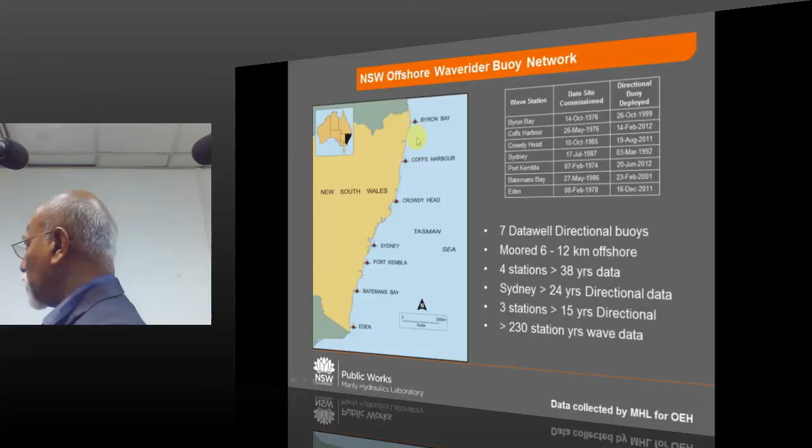When I was at LHI, we had three data buoys, but here we have seven, and four of them have been running over 38 years, all directional data buoys now. With Sydney, for 24 years we have three stations, 15 years directional, and altogether 230 station years of wave data.

It's about one of the best databases in the world, arguably. They're all in about 80 meters of water. The Sri Lanka ones were in about 20 meters of water, so when you're using a numerical model, you can't use it so extensively closer to the shoreline. That's a bit of a disadvantage we have in Sri Lanka.

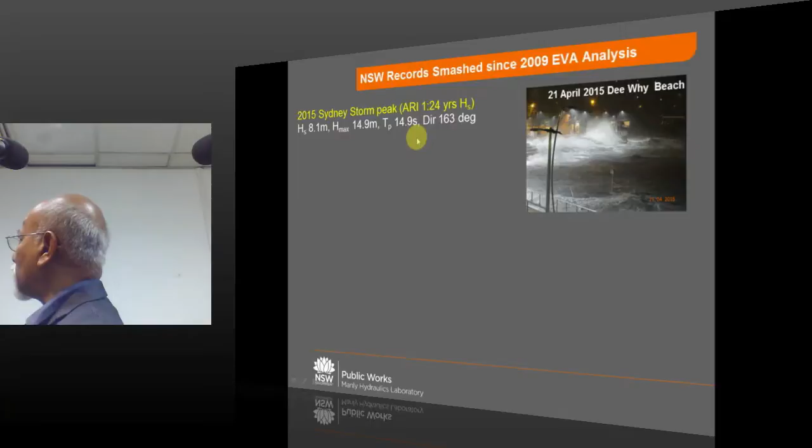This is actually two storms that happened quite close together. Notice here the direction is 163 degrees, coming from the southeast of the coast - you saw the coastline there. 97% of storms are from the southeast, but the June 6th storm was an unusual one.

This is the largest wave ever recorded, at 17.7 meters. This is the aftermath on the shoreline from that same June storm - you can see a swimming pool here, and these are very expensive houses at Collaroy Narrabeen, only about 10 minutes from the lab, so we've looked at this quite often.

Is there anybody here from the Coast Conservation Department? No? Well, the 100-year wave height in Sri Lanka when we were there was about 4.5 meters - say now it's 5 meters. This storm was well over 8 meters.

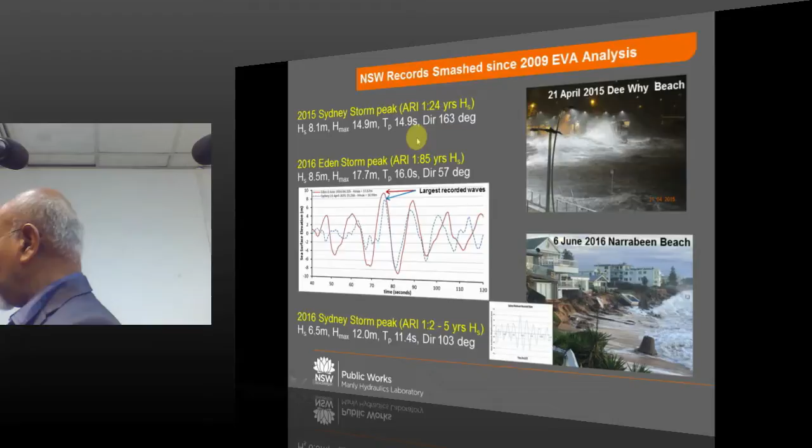Generally the size of a unit is the cube of the wave height. So for 5 meters that's 125, and for 8 meters to the power 3, about 512. So you can say any unit you use must be about 4 times the size of what we use in Sri Lanka.

Now, remember those wave data buoys - this is the storm. You can see how you can track a storm, and this immediately became very big. This is the largest wave ever recorded, and the most noticeable thing is the direction here is 90 degrees. Most of the time, 97% of the time, it's 160 to 180 degrees, but this storm remained at 90. That's why the nature of the damage was so different from previous storms.

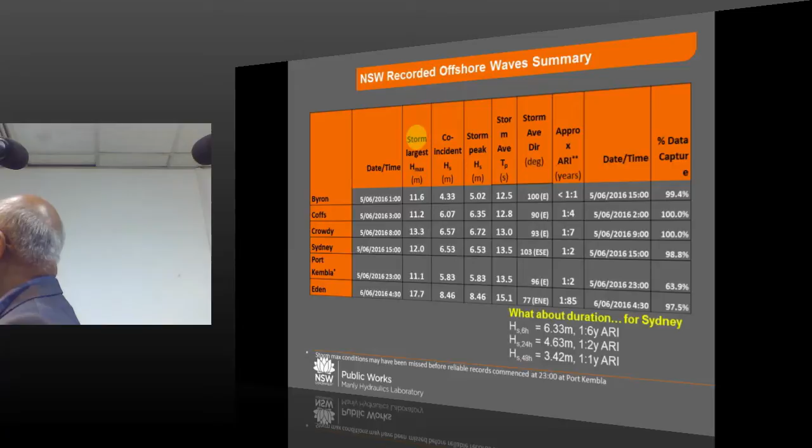These statistics show how important it is to collect data right down the shoreline. The lab has collected all these statistics - here in Eden, the maximum wave is 17.7, and wave periods are generally 12.5 to 15, which is useful when you're numerical modeling, because then you know what an extreme wave period is like.

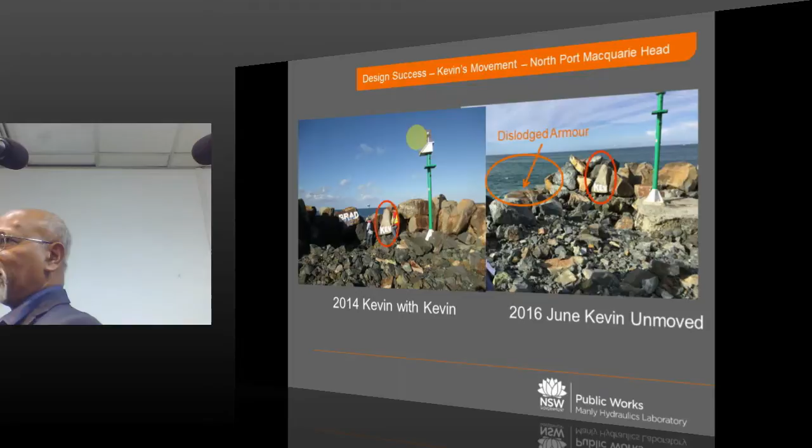Then there are successes also. This is Kevin, who does the drones, and in 2014 we named a rock after him because he's also about 125 kilos and plays prop forward - he doesn't move much. After the storm, all these other stones moved, but Kevin did not move, so he considered that a personal triumph of his.

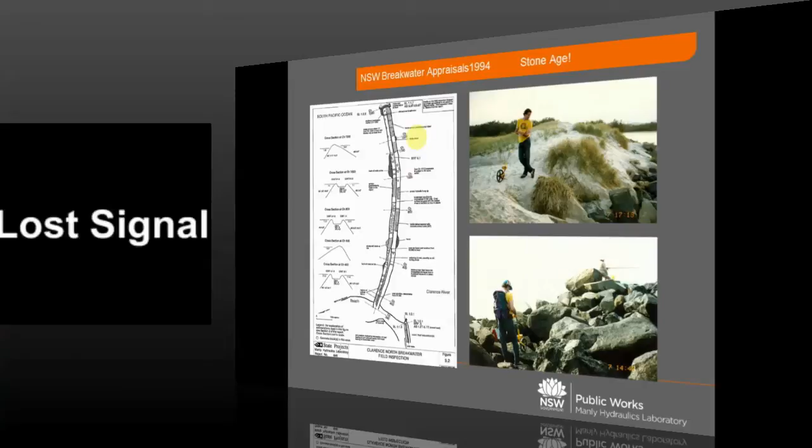I'll give you a brief history of changes to the breakwater assessment. This is Rob Jacobs, who's retiring next month after 36 years of work in the lab. He's not an engineer, he's a science officer, and a very meticulous guy. He first did the assessment of the breakwaters in 1993, and he put in all these details.

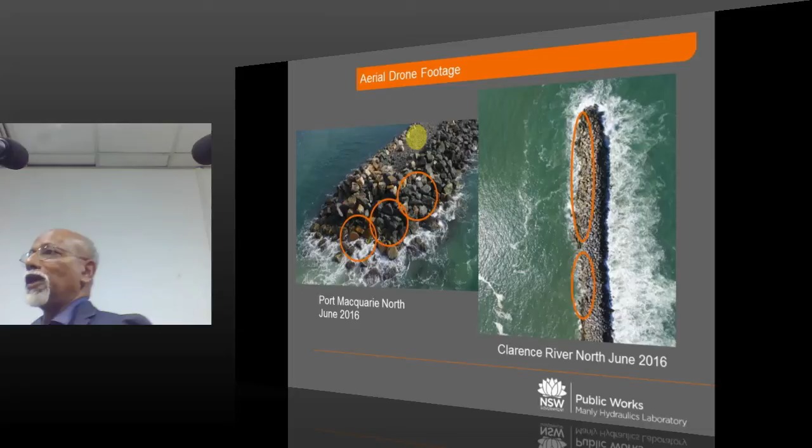Again, here are drone pictures - instead of climbing down a breakwater to photograph, we just put the drone up and get it. These are all damage photographs of a newly repaired breakwater. Previously, all the breakwaters were damaged on the southwest side, but here we're getting breakwater damage on the ocean side, or northeast side, because the storm was from the east. So it was an unusual learning curve for us.

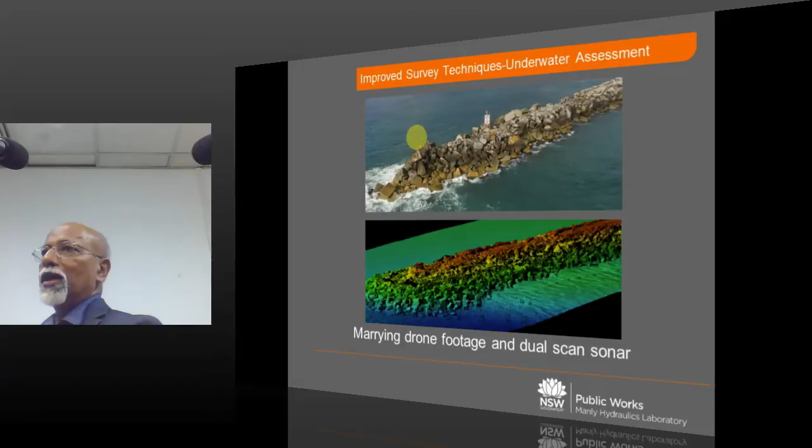Here we have a dual scan sonar, and we mesh it with the digital terrain model from the drones, and we can see almost every rock here. We can see movement, we can compare it. So that's how easy it has become for the younger engineers.

I'll give you - this is a quite famous guy called Melby, from the Corps of Engineers in America, and he outlined the functional design: plan and profile geometry, wave transmission, overtopping, wave diffraction and reflection, then filter sizing, armor stability, geotechnical settlement, toe stability, armor unit sizing, armor layer geometry, armor unit structural capacity, maintenance strategies, and assessment documentation.

This is actually - I don't know if you've heard of Stephen Hughes, he wrote the Bible on coastal wave and structure modeling. He was doing his PhD while I was doing my master's at the University of Florida. So when I told Steve I'm doing a talk at the Institute of Engineers in Australia, he sent me some slides. I want to acknowledge him, and since it was quite related to our breakwaters, I thought I'd put this up.

He says 265 navigation projects - if you have two training walls in each navigation project, you'll have 500 structures there. 40% are breakwaters and jetties, and 40% originated in the 1800s. It's very similar in Australia, the percentages - that's why I put this up. The design reality is, the majority of existing structures were designed and built without even rudimentary design guidance.

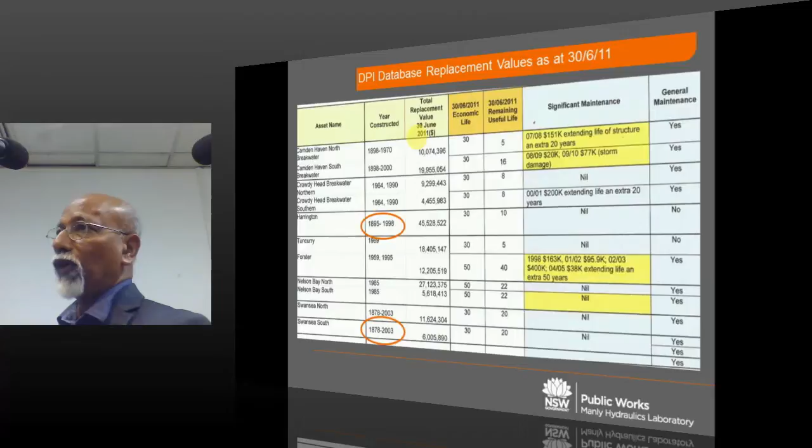This is what we've had all through the years. Now we have a computerized system, but we've always maintained good records. You can see that some of these structures were built in the 19th century. An economist gives us the remaining useful life, and since it's about a 1.5 billion dollar asset, we have to maintain it.

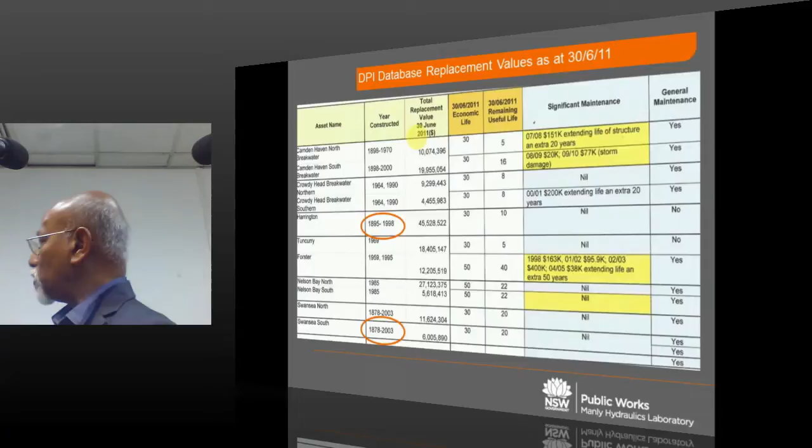We go and inspect these breakwaters after storms. But when there's a big storm, we inspect the whole coastline. I've done that on about four occasions: once in the 90s, in 2012, 2014, and then again after the June storm.

This is what the US Army Corps does. These guys have much more detail. They break the breakwater up, and they not only look at the breakwater, they also look at the shoals, the ebb shoals, and the harbor shoals.

Has anybody here done coastal engineering? There's Hetty, I know. It's important because it influences the structure. All the coastline, all the shoals around the area and between the training walls, influence the structure, so they look at all that.

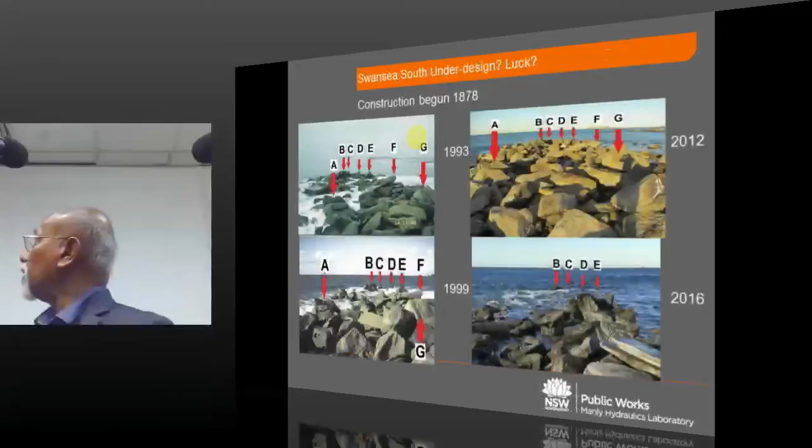Adapting to changes in functionality and adaptive design. You could say it's best to keep the breakwaters very well maintained.

But you can see here, this is the Swansea breakwater, a little further south from where it starts. You'll see the stones have not moved at all. A person might come and say we need to improve this, but it has served its purpose for 20-odd years, and we can see the stones have not moved at all.

This time things have gotten much more efficient. In those days we used to go in a car, and guys used to take their surfboards and all that. Now they make us go on time. There's a disadvantage in that - we fly to a point, then use a car, and they give us a certain time to do everything.

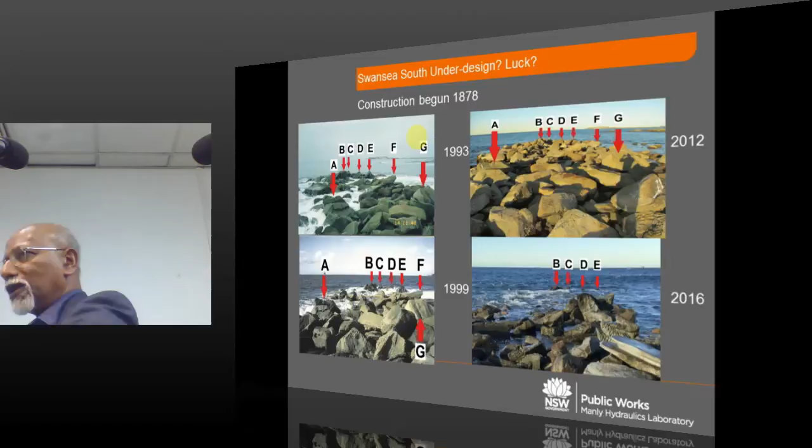Sometimes the tides are high, and earlier we would have just hung around and waited three hours for the water to go down before doing the assessment, and then we got all these pictures. This time we couldn't do that - the tide was high, and we had to finish the breakwater, so we only got a few shots. But you can imagine the stones were just the same.

This is a function that has changed completely. You'll see later - when I first went into this breakwater in 2008... actually I first went in 1990. I used to wonder why all these massive stones were used - what a waste of stone, I thought. You'll see later on that you don't need to have stone most of the time.

Then when I went in 2012, this huge outlet here had become a narrow outlet. You can see that, like in the Kaluganga, it got closer to the breakwater. If you look at Kaluganga, at one time we had a situation like this, and it got narrower. Then when I went in 2016, it was all sand.

So what happened here? This is what happened - you can see how past engineers used their experience when they built this. I was wondering why the rock was so huge and whether it was wasted. No, it was not, because every 20 or 25 years there is a breakthrough here and big waves hit this.

And here it's all sand, so this part is totally protected. That's what you call a change of function in that breakwater.

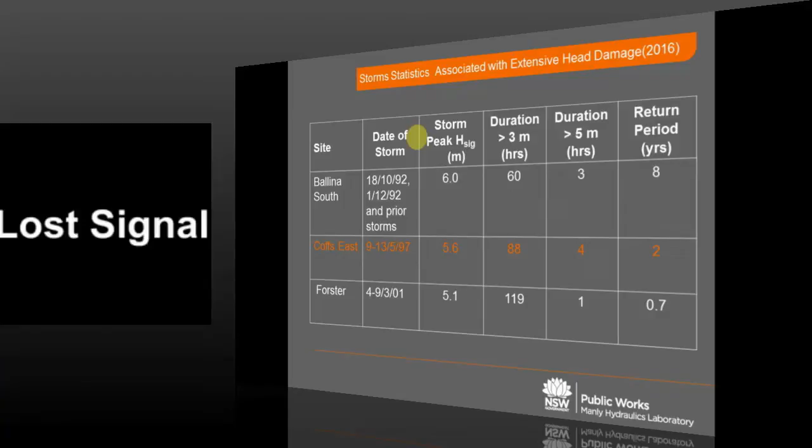So I'll just talk about 3 breakwaters, and these you have Coffs Harbour, probably the most exposed breakwater. We modeled these 3 breakwaters and they were quite successful, so I'll just talk about them. But the last one, we had quite a big failure this time in 2016.

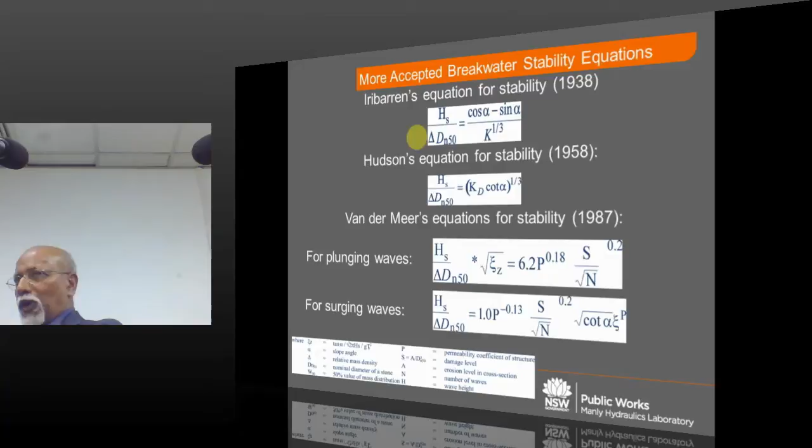I'm sure there are lots of people here who'd be interested in a bit of maths, just some equations here. Very surprisingly, this Iribarren almost got it correct in 1938. Hudson was a mathematician, so he used very few variables. You will wonder how come this is almost still used by all the Americans, and they don't use Van der Meer's. The Europeans use this, but they do the same thing. They get a stability number which should be about below 2.5 for a normal breakwater. But how come this is quite equivalent to this?

What Hudson did was, because he was a mathematician, he just used the minimum amount of variables, and all the variables were included in his physical model testing. He changed the water levels and so on, and he got the same result, and it's very effective still.

While Van der Meer put in all the variables, permeability - you'll notice here there's no period. How come you can test without a period? That was by changing the water level and having the waves breaking on the structure. Now here, he has included the period in this surf similarity parameter and the number of waves and so on and so forth.

So that's a very surprising set of equations in engineering, how the same thing is done with entirely different variables and quite effectively. The Americans partly don't use this because it was done in Van der Meer's PhD thesis using only 8 tests. But it's quite successful - he has modified it slightly over the years, but it's quite successful. Americans don't like that though, and they just keep on using Hudson.

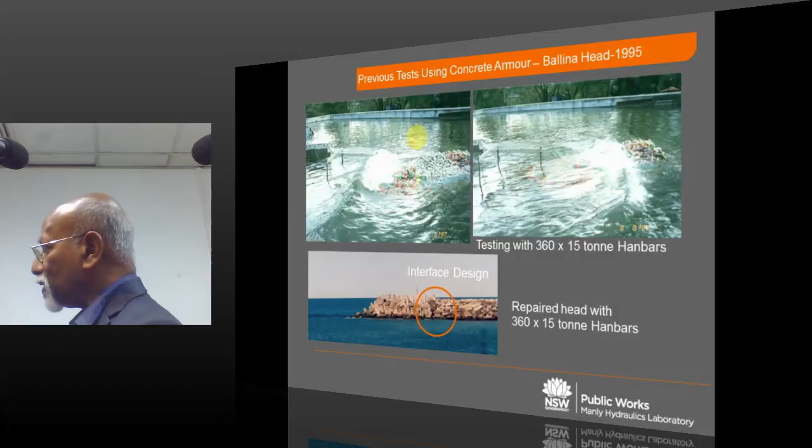Some of the problems here are that you have an interface between armor units and rock, and you have to mesh them very carefully - 10% size difference if they're to be successful. But the contractor didn't do that, and this is what happened. On the river side, it was well constructed. On the ocean side, the rock was much smaller than the armor unit, and there was massive damage.

But we repaired it in 2015 using big rock, and for the June 13th storm there was very little damage. So it was quite a successful repair. This is because we were using Hanbars, an Australian-made unit. Not much testing had been done, so I did this testing to compare it with other units around the world - the Antifer cubes, Acropods, which are very successful.

Here is damage, and here is what I call the stability number. You remember I said 2.5, so you want to stick in this range for your units, and you want to get lower than about 8% damage and so on. This unit has been very successful - this is what you call a third generation unit. But it is not used in Australia simply because of prejudice - it's a single layer unit and people don't want to use it.

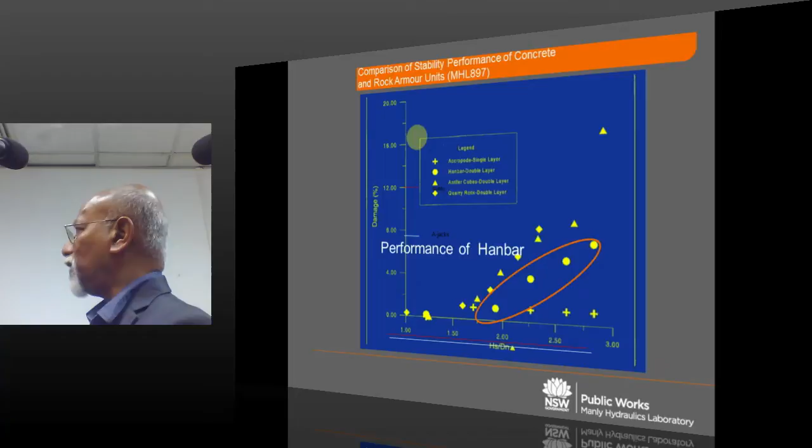So till someone uses it, nobody will use it. It's used elsewhere in the world - I think it's used in one place now. But mostly we use Hanbars, which is an Australian-made unit and quite successful. We have tested quite a lot of them. Peter Hanley from our department actually originally designed the unit.

And this is rock. Rock can be placed quite accurately now. But recently, when I talked to Steve and some of the guys from SURF, they sent me these photographs about a year ago. This is how we normally use them in Australia. These guys, I'll show you later, the Yaquina jetty where it was very difficult to repair.

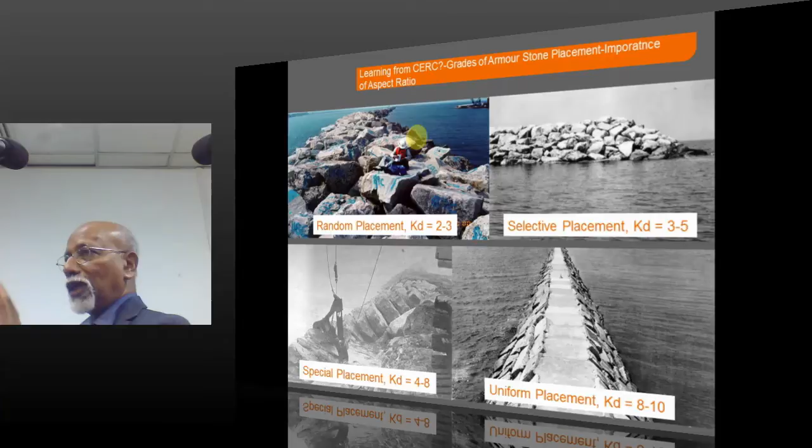It was damaged, massive damage. And they couldn't use concrete units, but they used rock in a very specific way where you have the lengthwise axis placed about 2 times the width. Normally you'd reject such a rock from the quarry, but they used it very effectively and got very high KD values.

KD value, I should have explained that, is a form of how you reduce your armor size. The higher you have a KD value, the lower your armor size. So you can say if it's 3 and this is 9, the armor size here will be 1/3. I don't know if you got that from that equation, but that is the kind of ratio.

Using numerical modeling to breakwater. My first numerical model was in 1996, and we used what is called the Mild Slope equation, and that's REF/DIF, and that diffracts the waves quite well.

The surprising thing when I did this modeling was, you notice here it suddenly jumps up at a chainage range of 1100, 1200 meters from the head. So they said, well, how can you have that? And I said, well, that's the result we got. We did it and we still got that. So I put it in the report. And then people said, oh, that can't be, that's not a proper result.

20 years later, in 2014, we were inspecting this breakwater, and exactly 200 meters from that was this massive hole. So the waves are getting concentrated there, and it was quite a good explanation of how accurate numerical modeling can be. And these are not the best models.

Now you get what's called the Boussinesq models and so on. This was slightly less effective than a Boussinesq model, but it did its job, and we quite accurately predicted that. That was one of the successes.

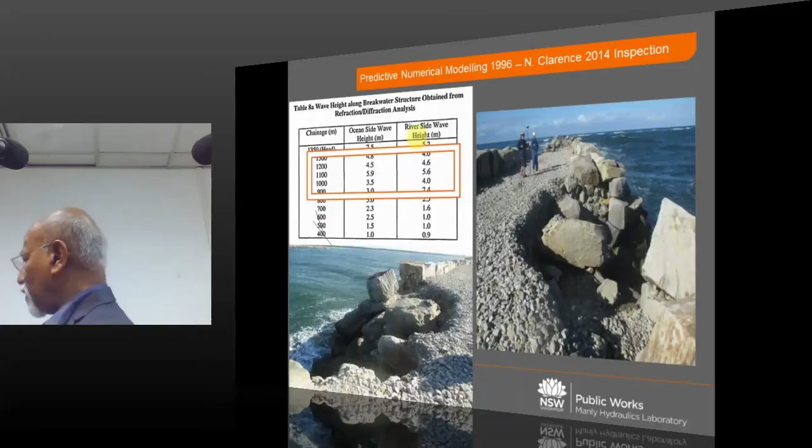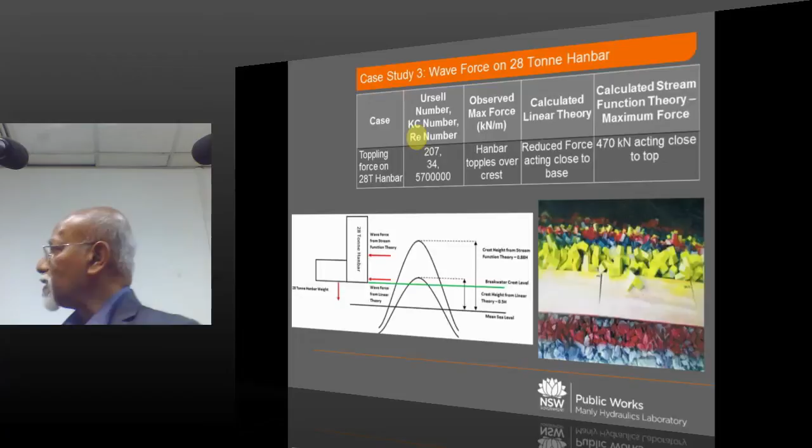So this is just an example of how you use second order theory and how useful it is. When we did the modeling, I'll talk to you about the Coffs breakwater.

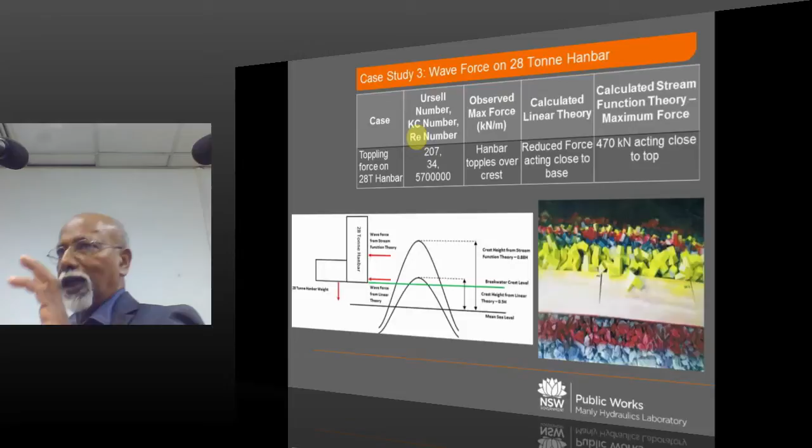You see these are all interlocked, and we had 28-ton Hanbars. These are 3 meters high. In the model it was about 1:45 scale, small units. They were displaced. And this is where the contractor, the construction and design engineer, and the supervisor have to talk together. I'll come back to this slide.

One week, I think the supervising contractor fell asleep, or he didn't attend, or he was ill or something. So the contractor happily went and replaced these, not like this, but vertically, over the 500 meters of that breakwater. And so they were very worried. We said, we didn't want to take any responsibility, this is not what we modeled.

So I did a quick calculation using what is called stream function theory, and that's what that previous slide showed. When you use stream function theory, if anybody is using it, it's not like cnoidal theory, it's quite easy to use.

Over about a 10-year period, Wiegel developed the tables on cnoidal theory. Similarly, a guy called Dean, Robert Dean, developed the tables on stream function theory. You can see here the stream function theory is the same wave. If you use normal linear wave theory, it's about halfway. Stream function theory shows that the crest is very much bigger. So if you take moments about this point, there is a massive load working, and you can show that it can topple if you keep it vertically.

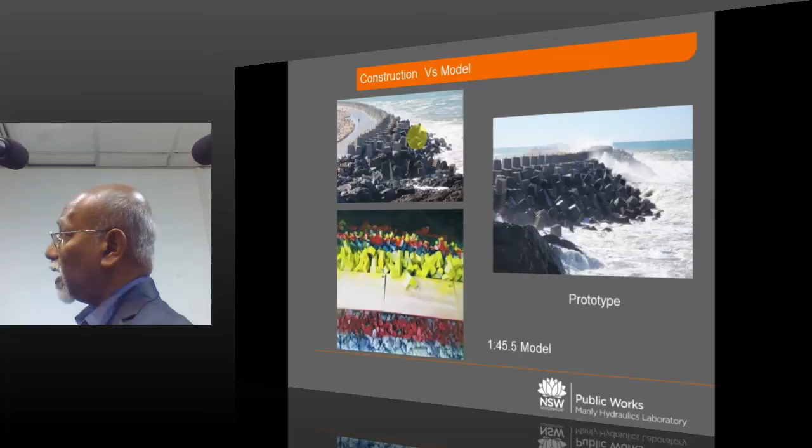So we wanted to exonerate ourselves, and we said, well, you have built it like this, but it can fall. So we left it at that. You can see how big these are - see this band here? They are massive, massive units.

And that is it, so this is a continuation of the stream function theory. I used it in a different paper to reconcile forces in a physical model with linear theory and second order theory. I used second order theory to reconcile some of the answers we got.

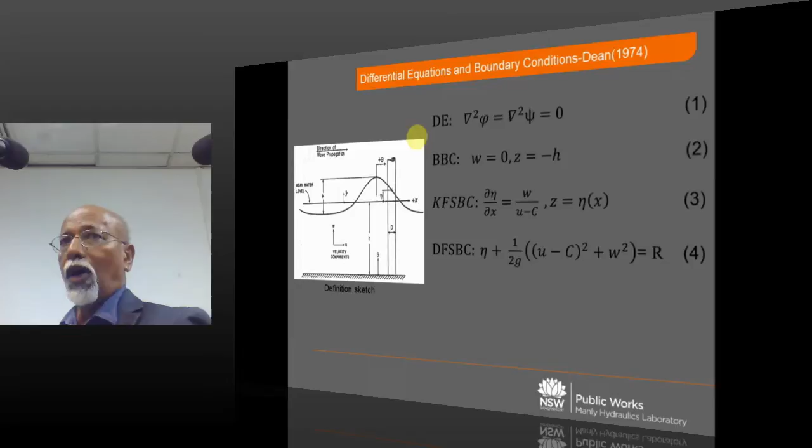So I'm sure if I don't put any equations, there will be a few guys here who will be disappointed. So I just want to show you about stream function theory, Dean, 1974. He was the chairman of our department in the University of Florida. He was essentially a mathematician who later became an engineer. And so you have the Laplace equation, bottom boundary condition.

We are saying the vertical velocity is 0. Then you have what is a kinematic free surface boundary condition, talking about the slope of the wave, and this is essentially Bernoulli's equation. What is interesting here is it's almost like Fourier transform analysis - if you've done any physical modeling, you will take 50 points in a physical model, unlike in real life where you take 2 points every second, so it's quite useful in a physical model.

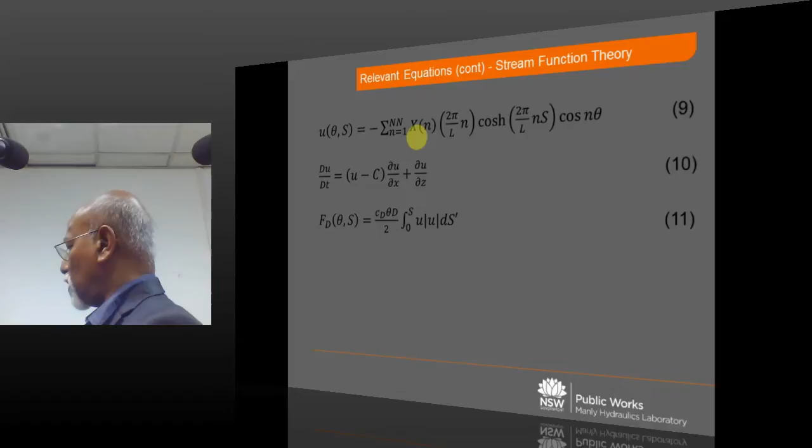You can use this stream function theory because it's like fitting a curve, just like Fourier transform analysis, and this is just integrating all the velocities to get the force. You're using a CD, which is a coefficient of drag. Now, going on to another aspect, this is wave runup, another design consideration, a very important aspect of breakwater design.

If you have a very smooth surface, concrete, you get 1. If you have rock, you get almost half that. And you'll see how that affects things. If you have an angle to the wave, no angle, you get a massive amount of runup. If you have just a 60-degree angle, much less. You'll see how that applies.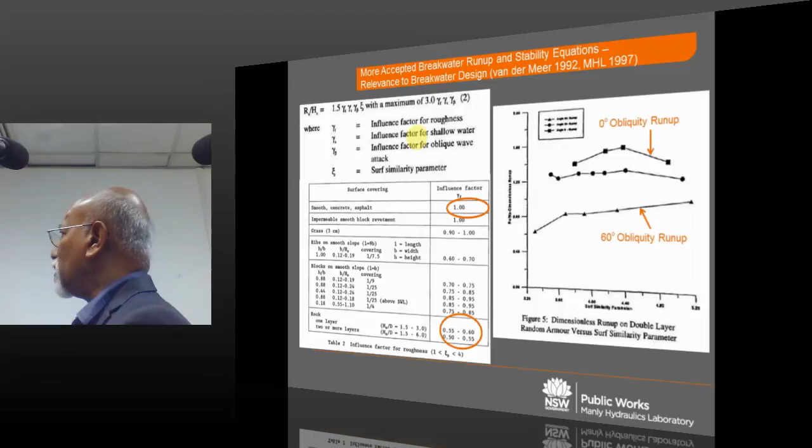But the actual - now you saw the overtopping in that first video, there's very little, as you can see how difficult it is. Prototype measurements of overtopping are very little - only Fukuda is supposed to have got it, now recently some others have done it, so it's all laboratory measurements.

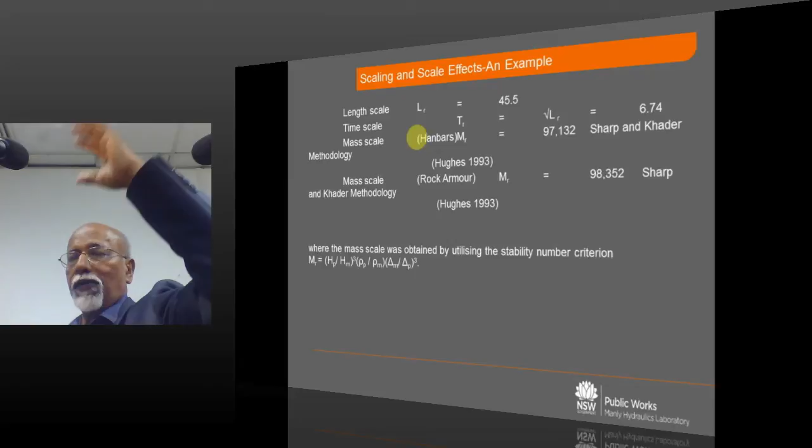This is just about scaling, Froude scaling, you must consider. We use two methods of mass scaling, Sharp and Khader, and Hughes. When the prototype armor is, say, basalt 2.6 and we are using very low density armor, we use Sharp and Khader. Otherwise, we use the Hudson's type of scale. That's all I put in.

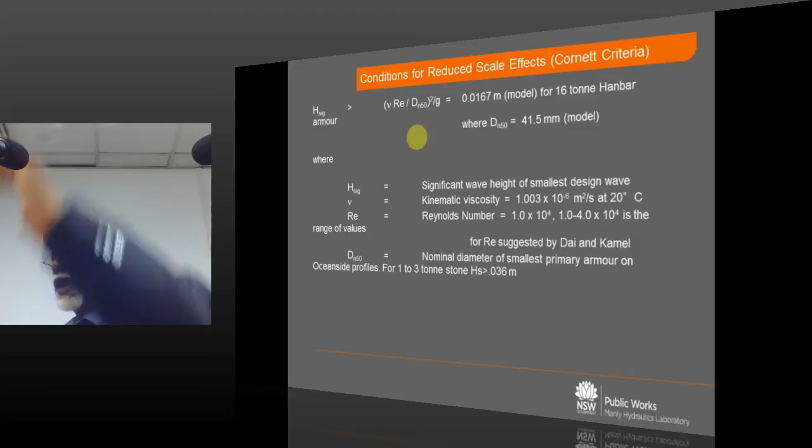This shows the conditions for how you get your scale in a model. We use certain Reynolds numbers because we don't want laminar effects in the model, so we suggest about 15 to 20,000, and we base our wave heights on that and scale accordingly. In this case, because the smallest stone is 3 tons, we have to use a wave height of 3.6 centimeters. If we use wave heights of about 5 or 6 centimeters, scaling effects are low, so we can guarantee the stability results. That's how we make sure our modeling is fairly accurate, or quite accurate sometimes.

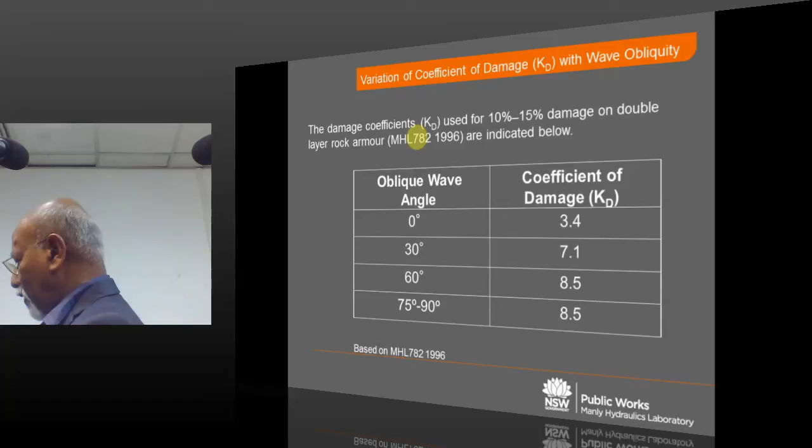You'll see why we did this. Simply because, these are models of a breakwater, Foster, which I talked about earlier. It goes down, and as you can see, the wave is 90 degrees here. But as it goes along the edge, 200, 300 meters down, it changes to 60, 70 degrees. What happens there is the KD changes. So down at 200 meters, when it's 60 degrees, you can use stone which is 2.5 times smaller, which saves an enormous amount. Those days, 100 years ago, they didn't know all that, so they used massive stones. But now with more analysis, we can use smaller stones in the design. So that was the reason for using oblique wave testing and measuring direction and so on.

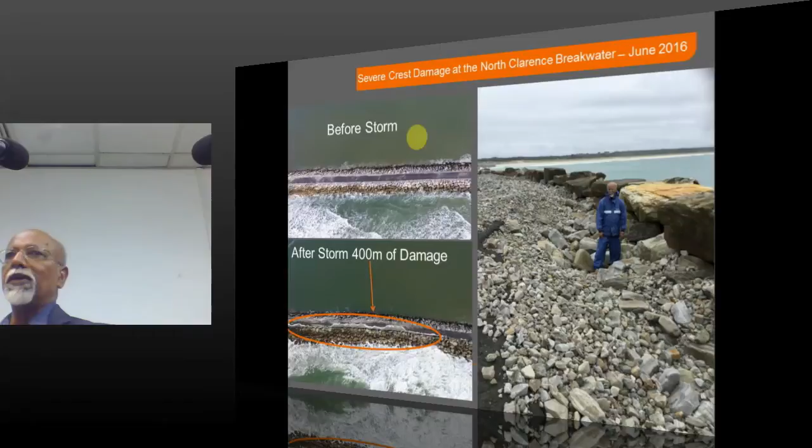This is a big error we made. We repaired this breakwater about a year ago, the longest breakwater, 1.5 kilometers long. We repaired it, and after the storm, we had 400 meters of crest damage. Here it is. Why was that? Simply because, remember I said when there's concrete, the friction factor is 1. When you have the armor, two-layer armor, the friction factor is about 0.55, half.

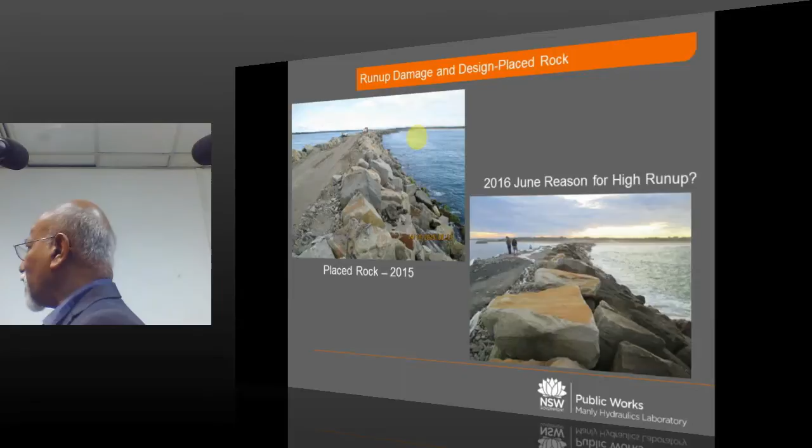Because in those days the repair machinery was not so good, they dumped it. Of course, you had to pay more to the contractors, but there was a lot of... this is not the best example, there are examples where it is very high friction. But with better machinery and contractors wanting to use less stone, they smoothen this out quite a lot. As a result, the waves run up much more and the crest gets damaged. So those are some of the pros and cons of using modern day machinery and very good reachers and so on.

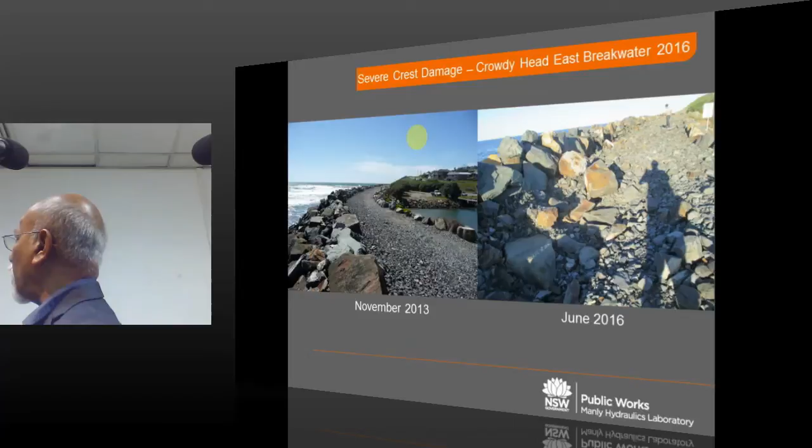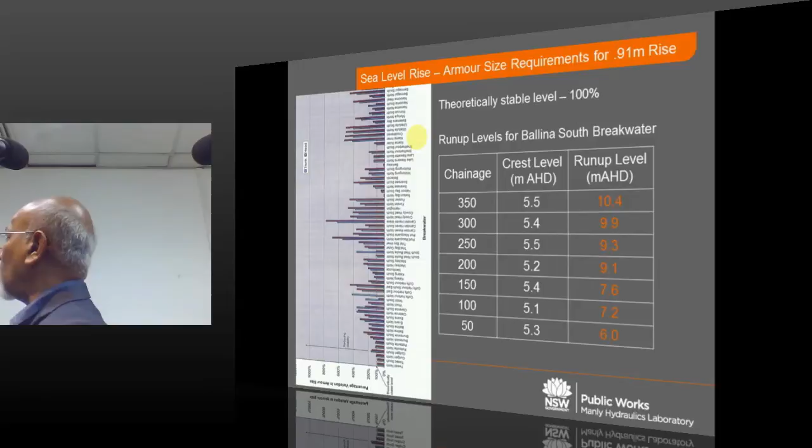Now this is a sort of solution for high wave runup, putting in a berm. This is one of the physical models I had done, and it showed that when you put in the berm, there's very little overtopping. But it is an expensive solution. There are places where it is necessary, where it's so dangerous.

I'll show you something - this is a berm, the only berm I could find in the 68 breakwaters. I don't know how it came there, there's no history of it. This is in Narooma, and we are doing an assessment now. Here the crest was not damaged, like in the previous one I showed you where the crest was damaged - this is just the breakwater next to that one. The crest was not damaged simply because of this berm. I don't know how the berm got there, probably it was a much lower breakwater originally. This was the head, and they extended the breakwater, keeping the original head this way and making this. So there is a natural berm there, which prevented overtopping and safeguarded against breakwater damage.

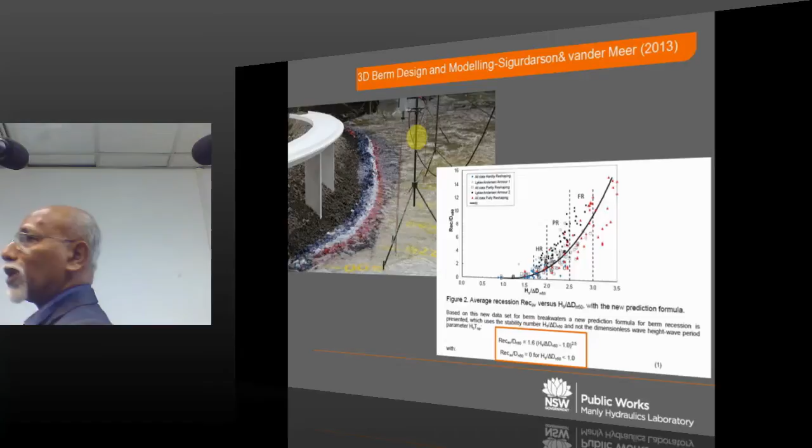This is actually modern - this guy was involved in the Hambantota design of the breakwaters, and I keep in touch with him. I worked with him 3 years ago, and he sent me his paper on Hambantota breakwater design. He's from Iceland and is an expert on Icelandic breakwaters. This is a model we did about 3 months ago, and we saved about 10 million. We are now using what is called berm design for getting better berms and designing them.

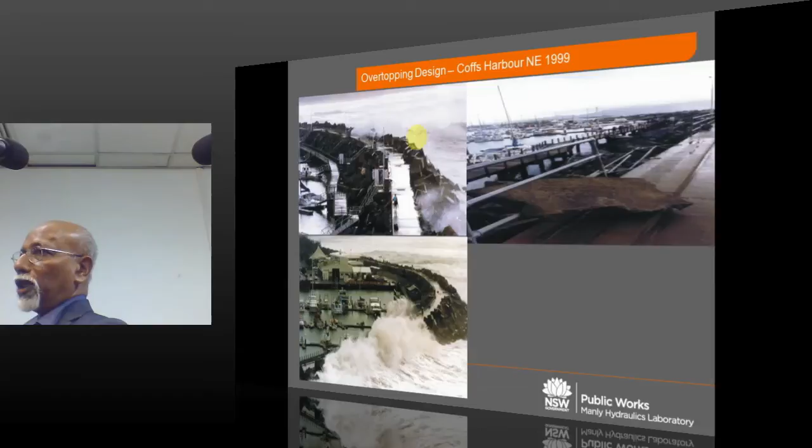Here's a place where a berm is necessary. There's a beautiful island on this end, and people keep walking through during storms. Can you see the storm going? This guy is happily walking through, and these are the kind of rocks that go through. There were two massive rocks which moved in this storm, which actually hit 2 boats, and they went down into the water. So this is a very dangerous place. Now what the department has done is put a gate across, and we forecast the waves - if there will probably be northeasterly waves, we lock the gates to prevent people from going for safety reasons.

Simulating accurate storm damage is very important for breakwater design. So here we have the Forster breakwater which I talked about. Every 3 years we had to do $200,000 worth of repair. We said, let's do a model. They said no, we'll just repair it again. They repaired it again, and for a small wave height, only 4.5 meters, it really got damaged. Then they asked us to do a model, and we did it. We showed that 8-ton armor units get damaged quite badly, but 11 tons is quite good. So we put in the 11-ton armor units, and this is the final result - we had 5 storms, some well over 4.5 meters, and very little damage to the breakwater.

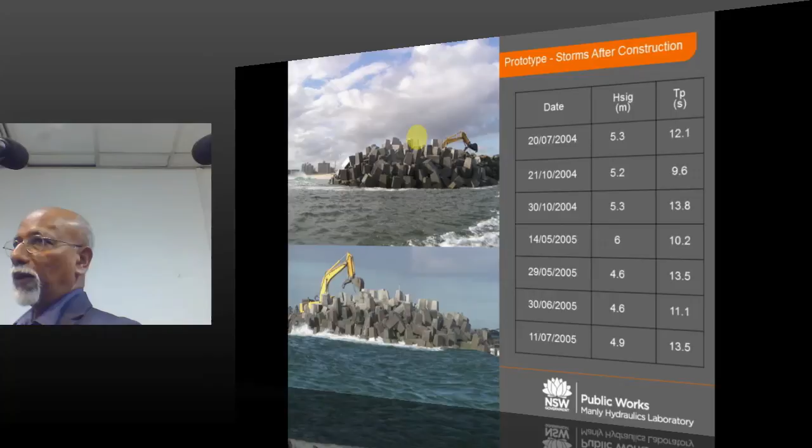But I told you about the state of a breakwater - as time went by, in the first year there were 6 big storms and nothing happened. Slowly it started to damage, and we didn't repair it. This is damage from 2006, then the May 2009 storm - what is called a 1 in 40 year storm, quite a big storm.

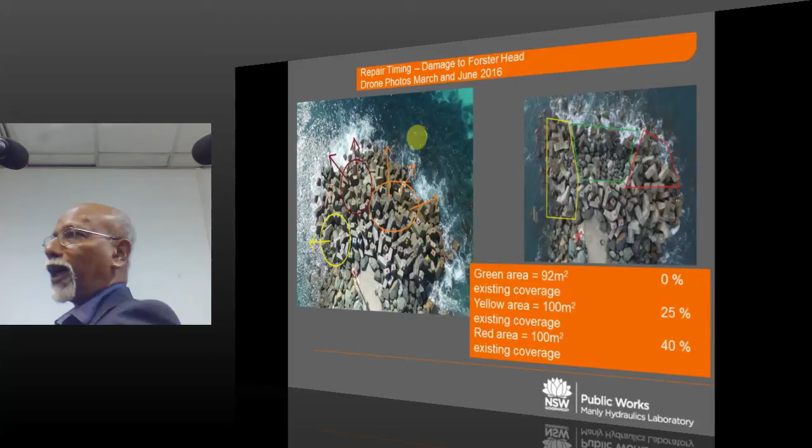This is what happened in June 2016. We were just about to repair it, we had collected all the armor units. It was at the site just before repair. The storm started, and this is massive damage here. This area has zero coverage, very big damage, which could have been prevented if we had just done the repair 3 or 4 months before. That's the importance of repair.

Simulating accurate wave and current interactions. Now, we've never actually simulated current and wave, we just modeled our breakwater design with waves. So when I talked to Steve about it, he said most of the time they did it, and they did it for this in 1978.

They spent $8 million and repaired this. But in 1988, there were 40,000 tons of rocks displaced. You can imagine, like 2,000 20-ton rocks displaced on this head. About 200 meters was lost, and they couldn't explain why. They had done an extensive model, and there was no damage on the model. But in real life, it got damaged.

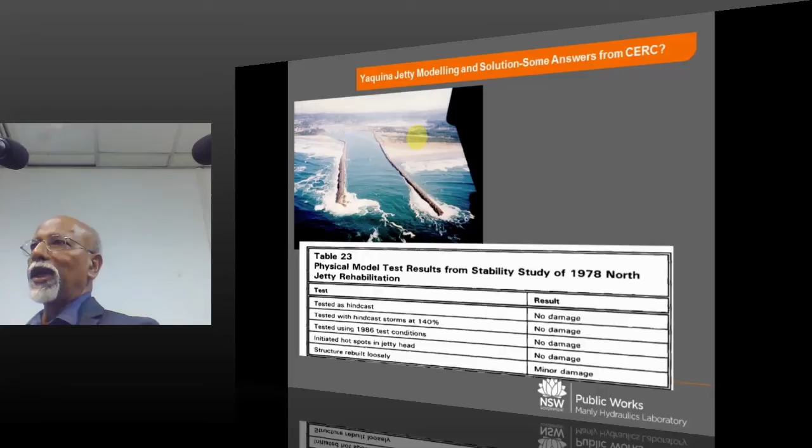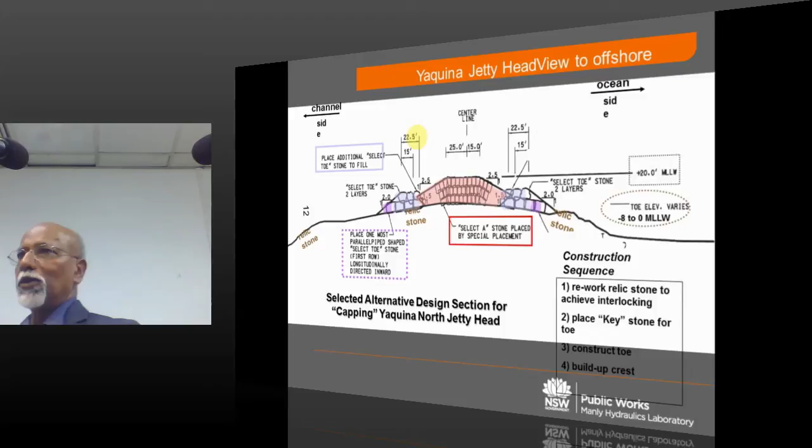So for each place, you have to consider what the interactions are, what is special about that location. You just can't go ahead and use one kind of solution for all. And this is one of the most vulnerable breakwaters, Coffs breakwater.

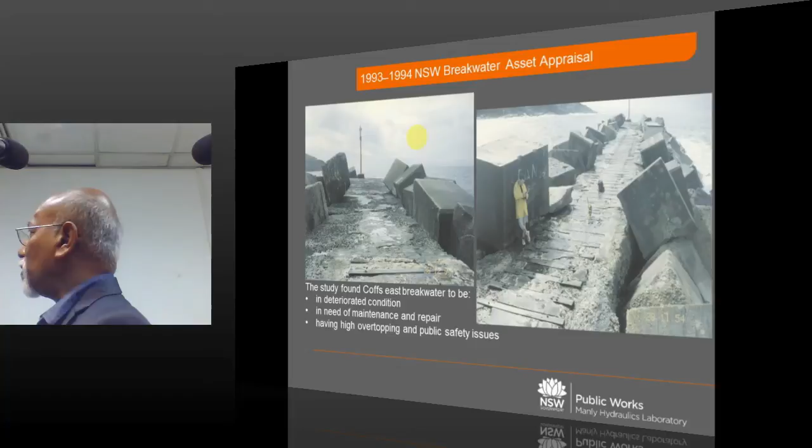We modeled this. In May 1997, a very small storm, a 1-in-1-year storm, came over. What happened? 12 armor units, not 2,000, were removed in one night. These are big units - 12 armor units removed in just one night. This is because the wave height and water level coincided - very high waves and very high tides. That is one of the reasons.

You can see here the wave direction was east-southeast, much more easterly than the normal waves. It changed suddenly and caused big repairs. The wave height and the water level coincided.

This is a numerical model showing a 1-in-100-year wave. A 1-in-100-year wave breaks offshore - that's why in the numerical model, a much smaller wave breaks here, causing much more damage. We design with 1-in-100-year conditions, but they may not be the worst conditions. A 1-in-1-year wave can actually be the worst condition, as it was here. So sometimes when you're modeling, you might model for a 1-in-100-year wave.

But I asked that question - do we use models optimally? Sometimes the client is satisfied that we've done a 1-in-100-year wave model, but it may not be the worst condition. The ideal thing is for the engineer to reduce the wave height and see if it really breaks on the breakwater - a much smaller wave height offshore can be much more damaging to a breakwater. Similarly, slight changes in direction can be very damaging.

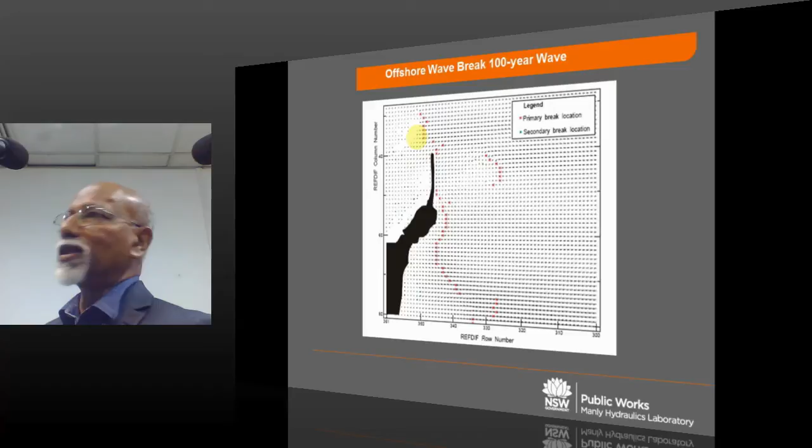In the 1990s we couldn't model what was under the water, like I showed you. So here we just modeled the damage above water, and it was a very successful repair. We put in these 28-ton armor units there. Just getting the crane up here cost $90,000. Then two weeks after that, everything was washed away, and we had to spend another $90,000. It was such a vulnerable breakwater.

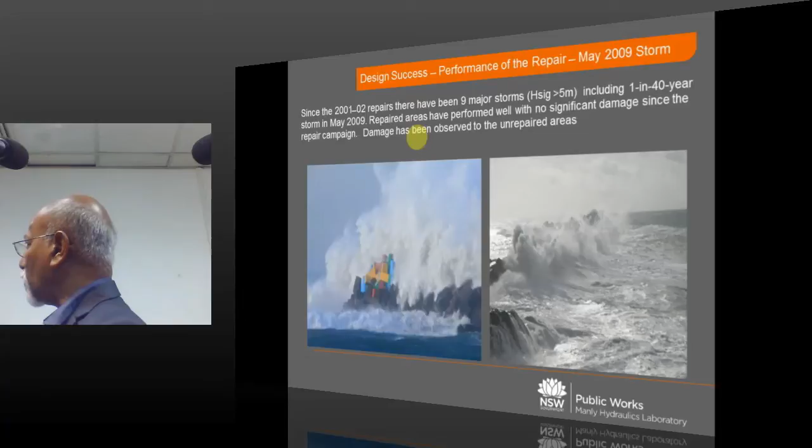And this is the storm that hit it subsequently, 5 or 6 years later. This was a 1 in 40 year storm, and this is a very big wave. These are, like I showed you, 3 meters. So the waves are going right over them, massive waves, all along the length of the breakwater.

And here's the damage on the head. Just 1 unit moved, so our modeling was quite good. We were quite confident about the model because we had replicated quite a lot of the conditions, and we had modeled it. But what happens next year?

A consultant comes in 2013 and says you've got to armor this side with 4,000 Hanbars. Each Hanbar is about $5,000. And also the same with this side. And he gives a bill to the Department of Land. Now, because we were speaking for the government, we said no way.

And we didn't have what the designers had here. We didn't put additional armor on the head. We only had these additional armor here, and we modeled it. And you can see the model here. This is our directional wave generator.

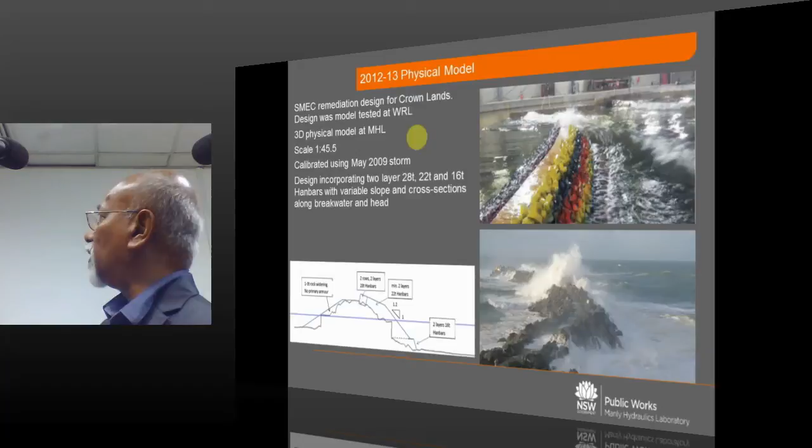And so they wanted it done quickly. Every single unit was placed exactly as it was in nature. This is an aerial photograph, and this is the model. Every single unit, if you look at this, is placed exactly as it is in real life, just like that. So we needed to be quite careful.

And we of course could simulate the exact damage from the 2009 storm. There, 1 unit had moved, but we got only 1 or 2 units moving. So the actual storm unit moved from here, but in our model we have 1 unit moving from here. So it was quite a good simulation of what actually happened.

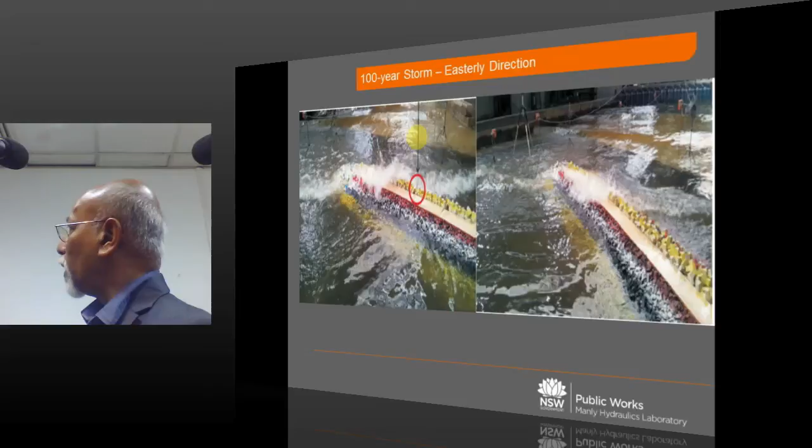And here are the results. Here again, like I showed you earlier, 1 unit moved. And then, unfortunately for us, 5 storms hit that breakwater soon after it was constructed. This is the last storm, 2016, and this was the result. For the first 5 storms, this was the most damage we noticed. On the harbour side, there was a little bit of crest damage. Other than that, there was very little.

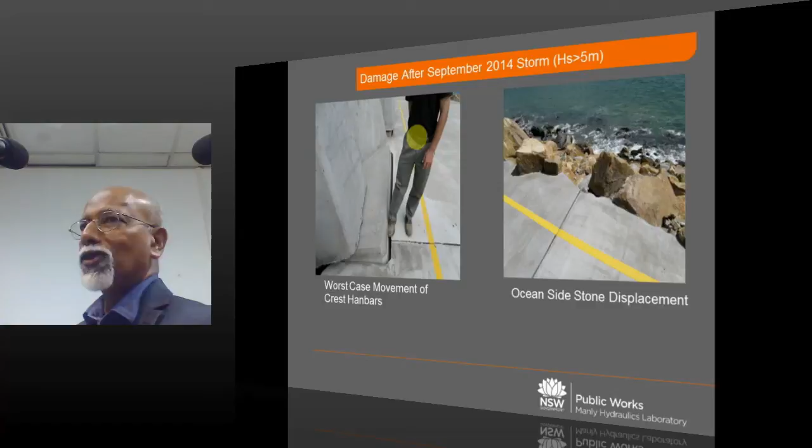And this is what was read out in Hansard. It says here that MHL saved the government 25 million. Actually, we considered it to be only 20 million, but we didn't say much because the government said it was 25 million, we just let it be. But this is the Hansard publication on the day.

And these are some of the conclusions. Physical modeling in conjunction with numerical modeling has provided an invaluable tool to select site-specific design storms and optimize repair strategies. Replicating storm damage in the model proved to be useful after the May 1997 storm and the May 2009 storm. In the Yaquina Jetty repair, simulating wave and current interactions was important.

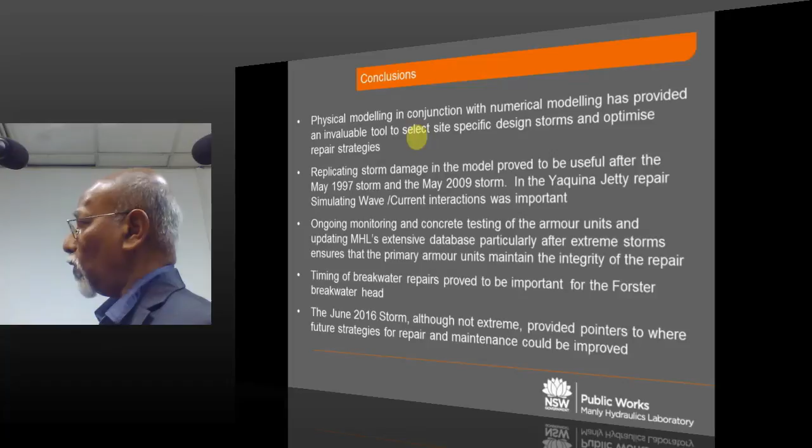None of our other models simulated both currents and waves. Ongoing monitoring and concrete testing of the armor units, updating MHL's extensive database, particularly after extreme storms, ensured the primary armor units maintained the integrity of the repair. Timing of the breakwater repair proved to be important for the Forster breakwater. The June 2016 storm, although not extreme, provided pointers to where future strategies for repair and maintenance could be improved.

Thank you. And this is a guy we really have a lot of faith in, he has a lot of faith in our design. Here is a fisherman who was there in a massive storm and he thought our breakwater would hold. So I put his picture in.

Any question? Just fire away. No. Yes, Eti? Okay, yeah.

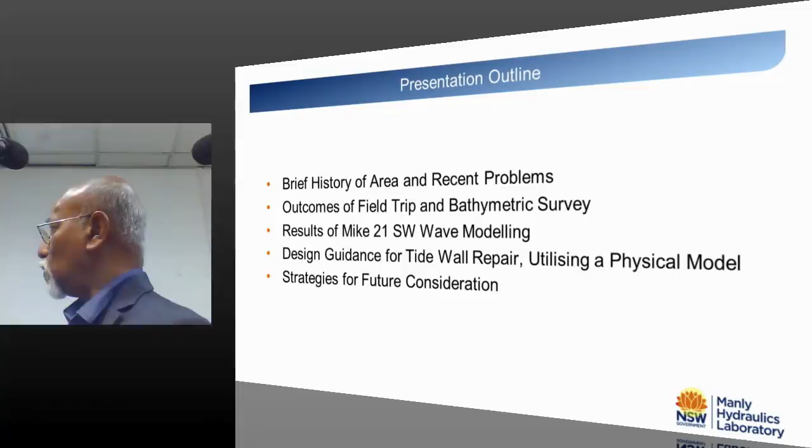So, a brief history of the area and recent problems, outcomes of a field trip and bathymetric survey, results of a Mike 21 SW wave modeling, design guidance for tide wall repairs utilizing a physical model, and strategies for future consideration.

These are important areas because the town is getting bigger and a lot of people use this. That's why the walls are deteriorating, so they asked us to investigate.

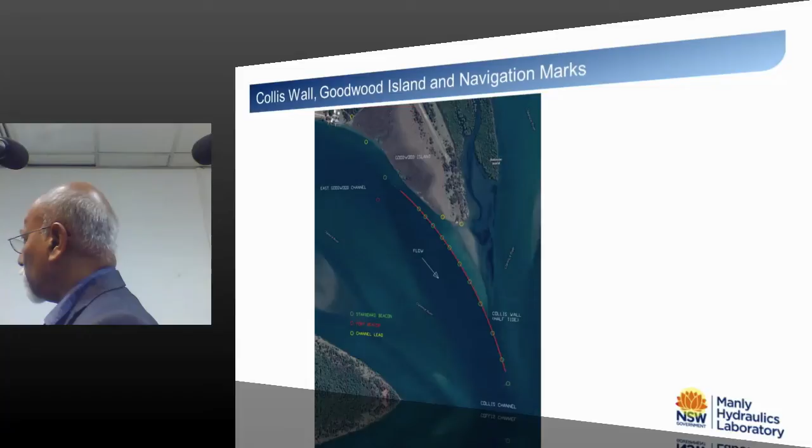So the structure started in 1893 here, and this is the Middle Wall. And this is again Collis Wall, and it has various structures on it - you have the channel beacons, then the harbor beacons, and so on and so forth. You'll see what is happening to them as the wall deteriorates.

So it was a bit of a quandary - there's not much history in the repair. How do we repair things like this, which have deteriorated? We can see here in 1995, Collis Wall was attached to Goodwood Island here, in this aerial photograph.

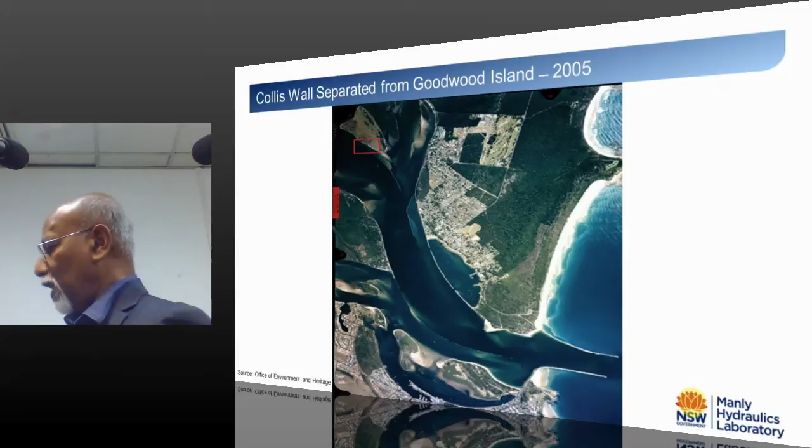By 2005, it is no longer attached. So during those 10 years, conditions deteriorated steadily. What happens then? You get massive erosion on the river banks, massive loss of land. The only house in that area has built their own riverfront, safeguarding their place, but go further down and you get massive erosion.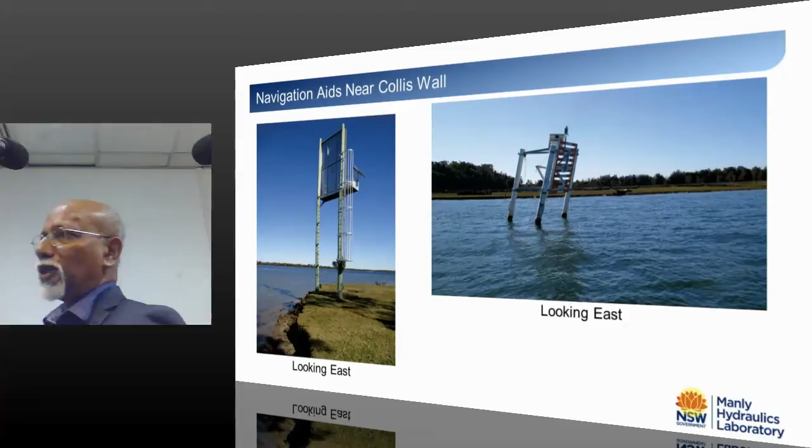We have water level recorders and water quality recorders at about 400 stations on the coastline. We have one here, and you can see there have been storms and floods, but in the last 5 years there have been quite a few. The frequency has increased, and these floods - we don't measure the velocities, but they are estimated to be about 5 to 6 meters per second. So how do you design a wall for 5 to 6 meter flow rates?

Quite an unusual situation. So this is actually the bathymetry, and you can see there are massive sand waves. These slowly reduce with time, but they are caused by the floods, not by the ebb and flood tide. This is going up to 12 meters here near the wall, and the wall is falling into these holes, it's deteriorating. This whole riverbank is now eroding at a high rate, massive loss of land.

So it was a big problem for the harbour master. This is one of the reasons - we really looked into the history and found that dredging was done here in those days. What they used to do was put the dredge material on the other side of the wall, to reinforce that wall, that area. It was connected. But as time went on, you couldn't put dredge material there because of ecological concerns on land itself, so you had to put it offshore.

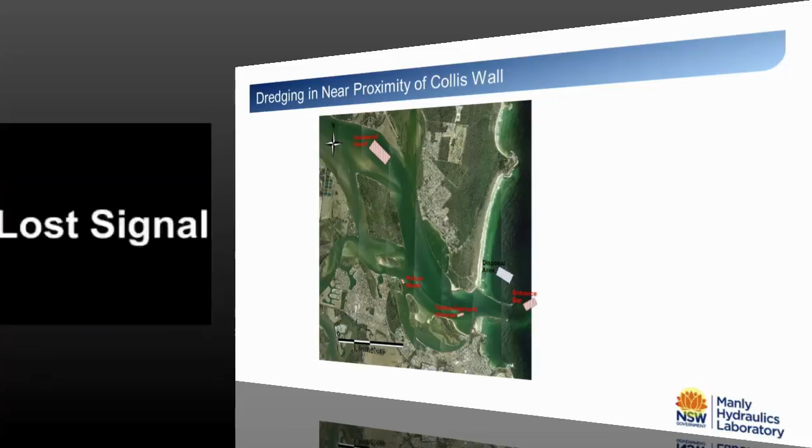So they started putting it there instead. So the land side of the walls was getting neglected, and the walls were falling down.

So here at the middle wall, there was a train line that ran along this. These rocks were for the train line, about 3-ton rocks here. This is also deteriorating. There's massive erosion on the banks, huge erosion because that wall has been going down.

Now the mean level of that wall is just about 50 centimeters higher than the highest tide, and at Collis Wall it's about at mean sea level, so it's a big problem. There's a lot of development on this side, too. This town is growing. Clarence is a big town.

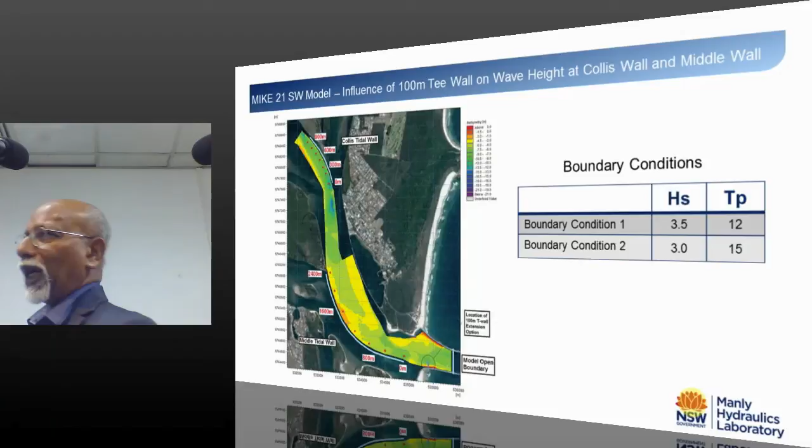So what we did was run a numerical model, we did the SW. We had the BW model but didn't run it because we didn't have money for that, and also there's a lot of wave breaking here, so we ran the SW model of the Mike 21.

Here, what we used as boundary conditions were the boundary conditions we used before, for the one design of the 1.4 kilometer breakwater. We had run it up to about somewhere here, so very conveniently for the 100-year wave, we used this boundary condition.

So when you're using one model, you've always got to think: how can I best use it in another model? And here we are using it in an entirely different model.

So we looked at the waves that come down this, and we looked at Whiting Beach as well, which is eroding, as I showed you. We put in a little groyne here to see the influence of that on the waves and their direction—most importantly, the direction. If you know about longshore transport, if the waves are perpendicular there's less longshore transport; if they're at an angle, you get more.

And we put a second 100-meter T-wall. There's a little bit here from some old construction—we don't know the history of it—so we thought we could extend that. Those were the two options we tried in our model.

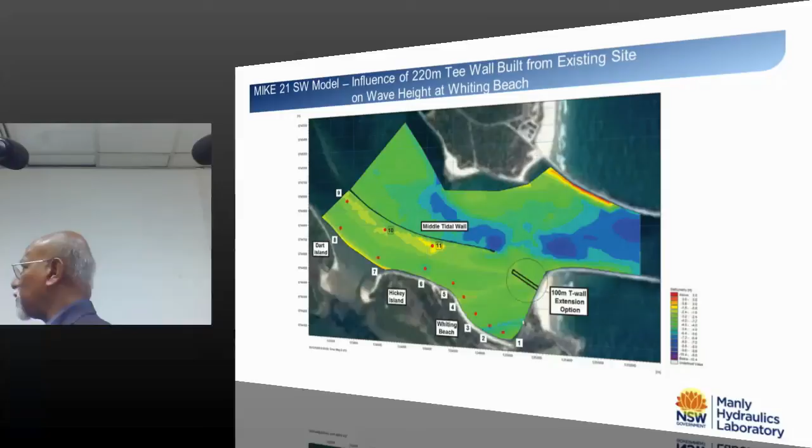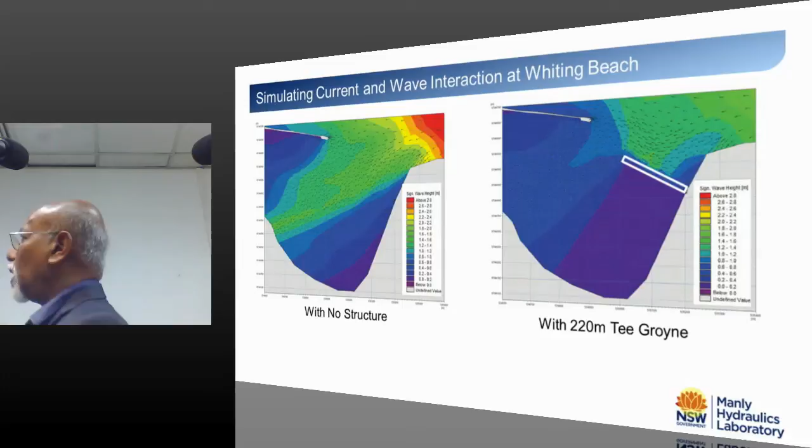We also simulated currents, because Manly Hydraulics Lab had taken tidal current measurements there over 20 years, and we knew the currents were about 1.4 meters at maximum. So we ran a 0.7 meter current here with 100-year wave conditions—we thought that would be sufficient.

And we got about a meter wave height at the head of middle wall. At Collis Wall it was very, very small, less than 10 centimeters. So we weren't really worried about the waves at Collis Wall, but we were certainly worried about the waves at middle wall. Remember, I told you there can be 6 meters per second or 5 meters per second currents there.

Similarly, when we combined waves and currents, we got quite sensible results—that is, with no tide, in the flood tide and the ebb tide, we just got a very reasonable result from an engineering sense.

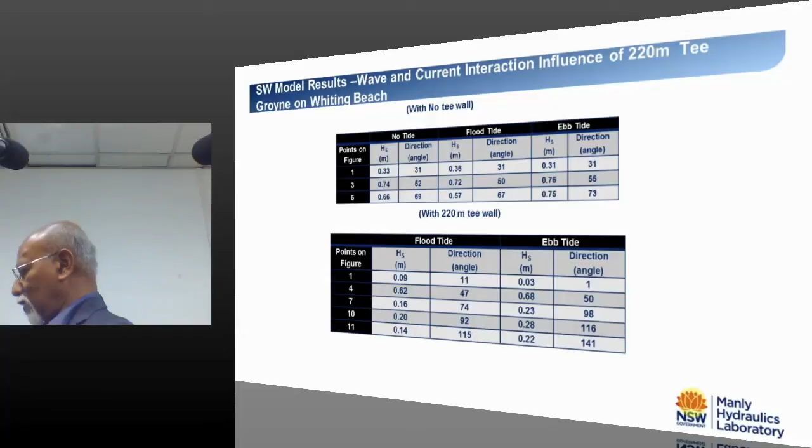Now the ideal thing would be to monitor this very carefully to get a theoretical understanding of it, but they haven't done that. Still, the beach is surviving. They've missed a glorious opportunity to monitor it. But hopefully—I was talking to the engineer there, Andy, I worked with him.

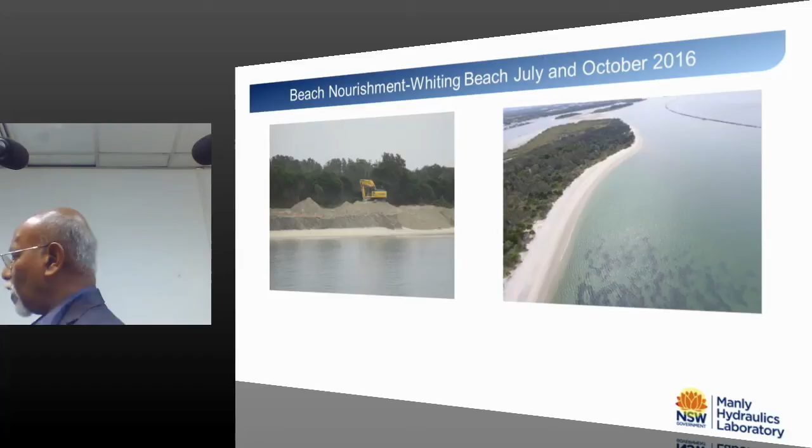He was one of the co-authors, so that's what he intends to do. This is Collis Wall, and this is how we are going to repair it. Much smaller armor, as I say.

We took the cross sections, and what the real unknown was the currents. So what we did was use current modeling from a previous model, which I haven't seen done before, based on the PIANC guidelines for berthing structures. We had used it in...

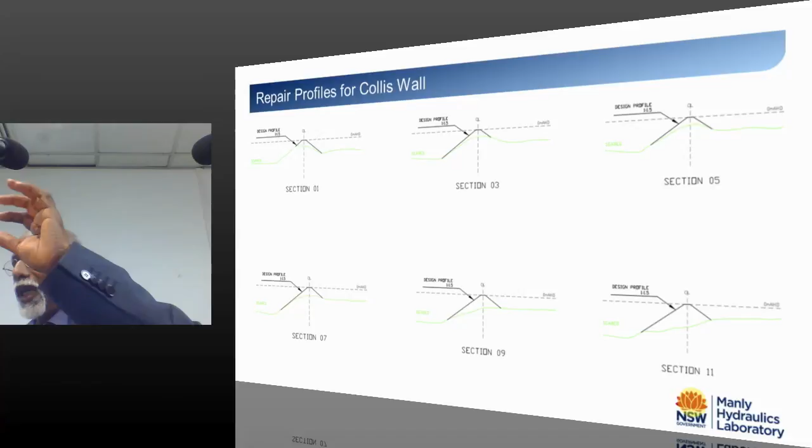A port engineering organization had asked us to build a rock mound as a brake to a breaking ship, because in Fremantle, one of the ships, during a meteor tsunami caused by meteorological conditions, struck the bridge, and the city lost electricity for 3 days. So they came to us and said, build us a brake and a rock mound structure to prevent such a thing happening.

So we used that modeling to repair these. We modeled that with 5 to 6 meter currents. So this is that model, in the flume.

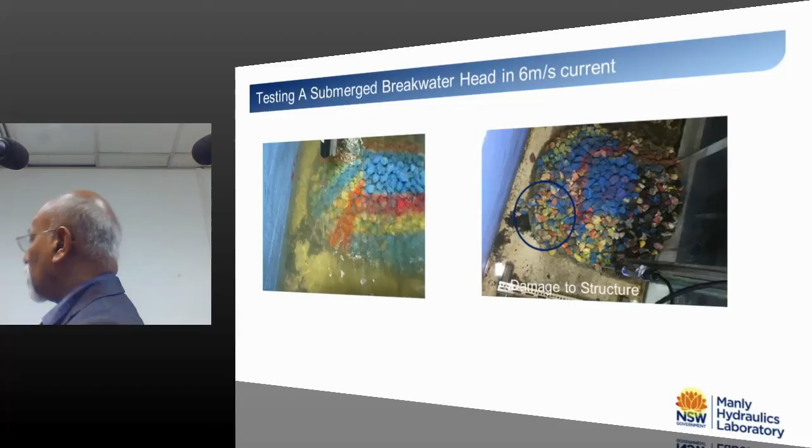We are looking at 5 to 6 meter currents, which we normally don't use, using an ADV, acoustic Doppler velocimeter, measuring right around the rock mound and breakwater. So we got some experience. We measured it in 2-dimension and 3-dimension.

These were jets from thrusters which they wanted to prevent the rock mound from being damaged. These jets are 6 meters per second, very similar to the currents from the floods. So we had experience of high currents, and we used the theoretical variation in the jet and tried to match that in real life.

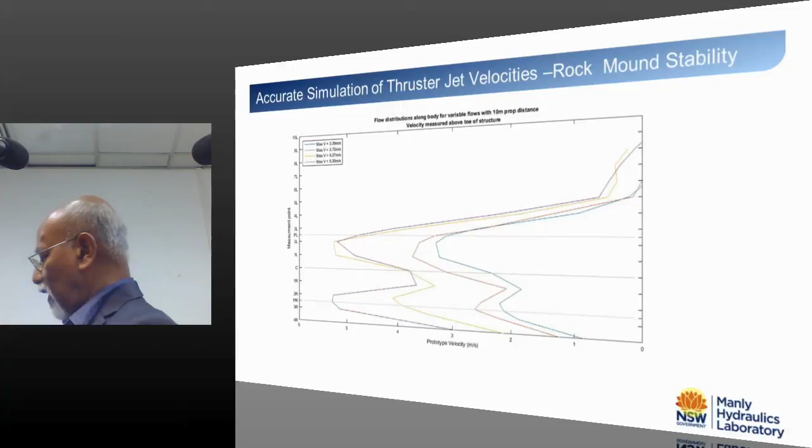We got a fairly good match. If you notice here, they go up to more than 5 meters per second, 2 jets coming onto the structure. In a sense, we had massive currents on the structure, and there was very little damage. There was a little damage.

When you use basalt, there was no damage. But with this slightly lower density rock and sandstone, there was damage. So it was sort of optimized that way.

We designed two options to connect Collis Wall to Goodwood Island. One is a long option, more expensive; one is a short option. With the short option you might lose this amount of land, so you have to weigh the consequences.

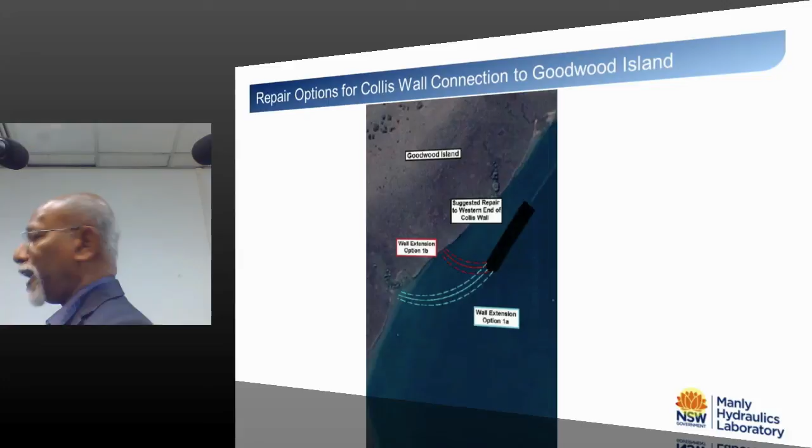But then we had to put a scour blanket on Collis Wall because it was getting loaded, and then repair the western and southern end of Collis Wall with small rock. Then connect Collis Wall to Goodwood Island and fill the gap between the land and the wall. Remember, I told you they took the dredge material out and put it offshore - they're saying put that material in again, so that's another option.

And then protection for Goodwood Island, 2 options: first, cut off flow between Collis Wall and Goodwood Island; the other, more expensive option, would be, for the homeowners on the island living in close proximity, to build a revetment structure. Then for middle wall, it's best to use about 3-ton rock and build a 220-meter groin, as we showed, and then nourish Whiting Beach as well.